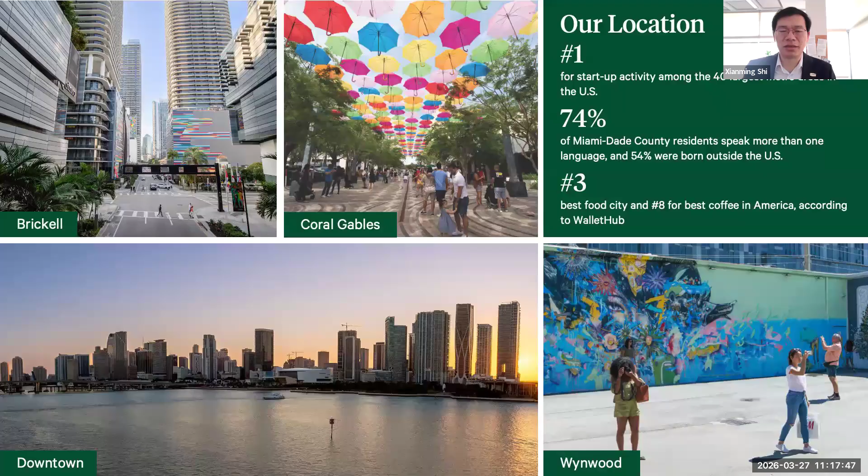Before I start, a little bit of infomercial in terms of who we are, for those of you who don't know about University of Miami, since I know this is going to be on YouTube. We are in a wonderful city, Coral Gables, which is very close to Miami, and there's a lot of entrepreneurship in the area and abundance of opportunities and good food.

So what's the background of this? Before we jump into the tools or solutions, human society truly faces tremendous challenges when it comes to the built environment, especially. For example, the transportation system, as we know it, is getting really old and aged, and there's a lot of deferred maintenance, and the durability and reliability of the built environment is compromised by many different distresses.

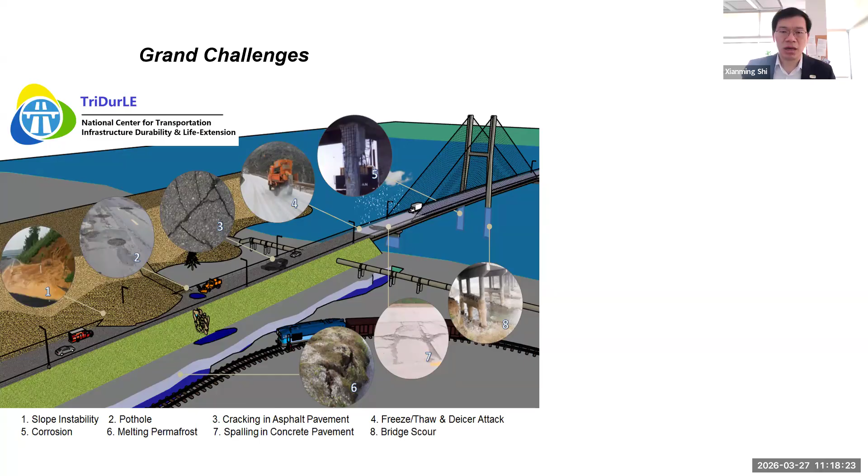On top of that, we also have climate change as we know it. It's not just CO2, but also other greenhouse gas emissions. When it comes to the specifics of man-made CO2 or CO2 equivalent emissions, both the building sector and construction materials contribute a significant chunk, one of which is the use of cement. Ordinary Portland cement, typically 1 ton of cement, takes about 0.8 tons of CO2 emission. So that's a challenge we need to tackle.

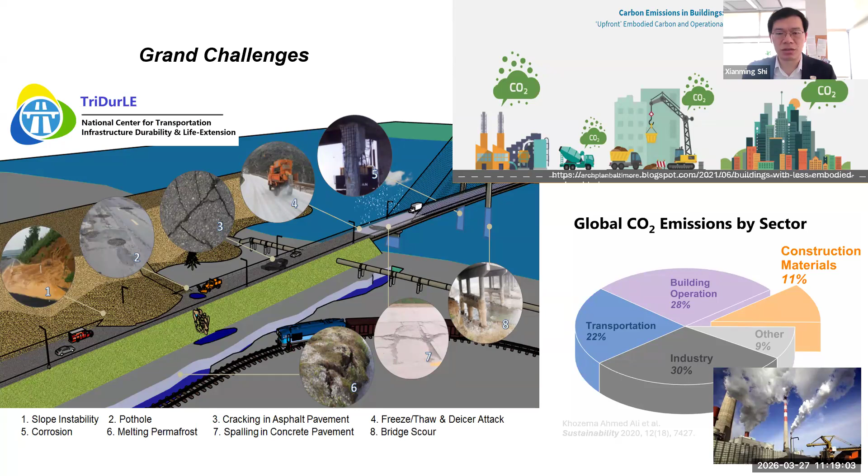So what is our vision? The vision is really making infrastructure part of the climate solution, because we always consider infrastructure as part of the problem when it comes to climate change. Here's a patent we applied for back in 2023, I believe, and the IP is already licensed to a company in the UK. Basically, the way we do it is leverage this material known as biochar.

Biochar is nothing new. Farmers in Africa had played with this material for thousands of years when it comes to soil amendment. But in recent decades, because of the interest in biochar sequestering CO2 and slowing down the release of CO2 back into the atmosphere, the agriculture industry has been increasingly interested in biochar. But when it comes to the construction industry, this is relatively new.

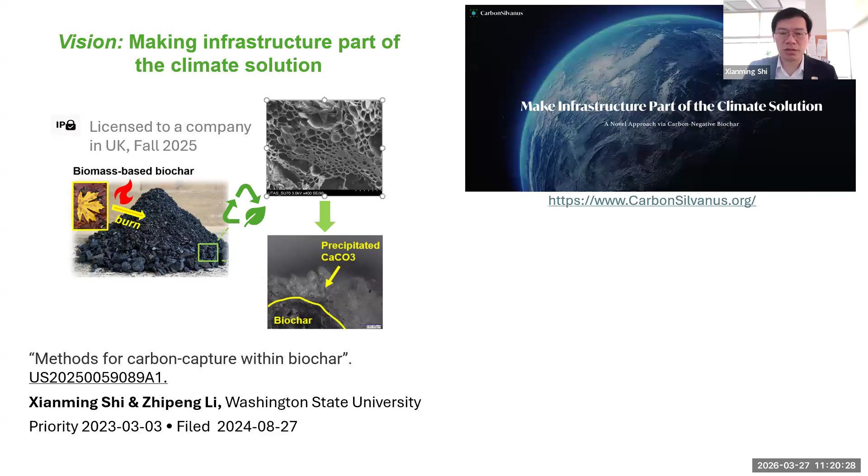So we filed this patent back in 2023 and licensed it last year. Our IP is more focused on how to make this biochar more valuable. As I'll share with you later, we did some surface engineering of this biochar, and we launched the company in 2024.

This chart on the bottom right shows the x-axis is the particle size, the y-axis is the specific surface area. The typical coarse aggregate or rock we use, or gravel, in concrete is relatively large, as you can see at the bottom right. If you can find a way to make it really, really small, we're talking about nanometer size, for instance 1 nanometer - for reference, human hair is about 80 microns, or 80,000 nanometers, in diameter. So if you can make things really, really fine, then you will achieve between 10,000 to 1 million square meters per kilogram of surface area. And with that, there's a certain nano effect, and the material becomes much more reactive.

So that's kind of the guiding principle for the IP we produce: to precipitate nano or submicron sized calcium carbonate on the surface of the biochar, because biochar is mostly a carbon-rich material. Depending on the feedstock and the pyrolysis procedure, you could have probably 40 to 95% carbon.

So in a way, it's counterintuitive. Why do we put carbon into concrete? Because traditional wisdom tells us that's silly and it's not even allowed, since it may take away a lot of the admixtures or chemical additives in fresh concrete. In many states, for instance, the Department of Transportation would not allow anything having a loss on ignition higher than 3%. Here we're putting in a material which has a lot of carbon, or a high loss on ignition, so that's counterintuitive. That's exactly where, when you challenge traditional wisdom, innovation occurs.

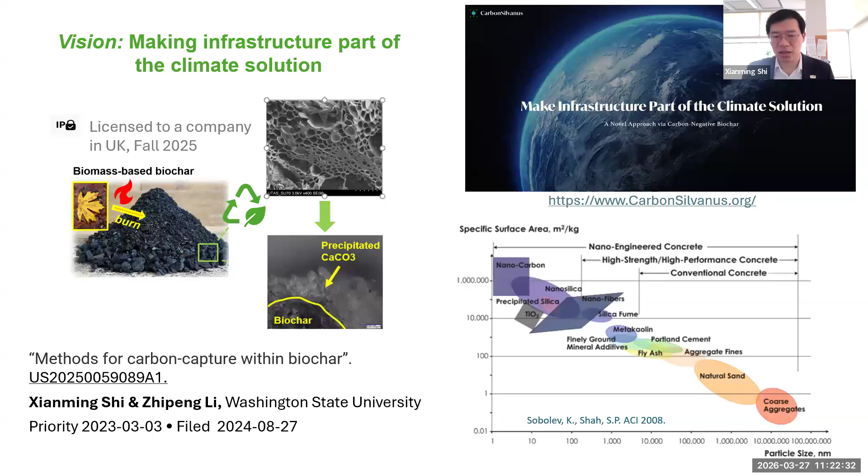So again, in addition to putting engineered biochar into cementitious composites such as concrete, mortar, grout, or paste, we also try to engineer it so that it's suitable for asphalt. For asphalt pavement, when we pave it, there's a lot of toxic fume coming out of the pavement—that's one issue. And also, asphalt pavement by itself has its own carbon footprint. So we have an ongoing study, sponsored by the U.S. Department of Agriculture, trying to divert agriculture waste or farm waste toward this process to produce biochar, which would then replace a part of the asphalt binder and some of the mineral fillers in the asphalt mixture and make it net zero.

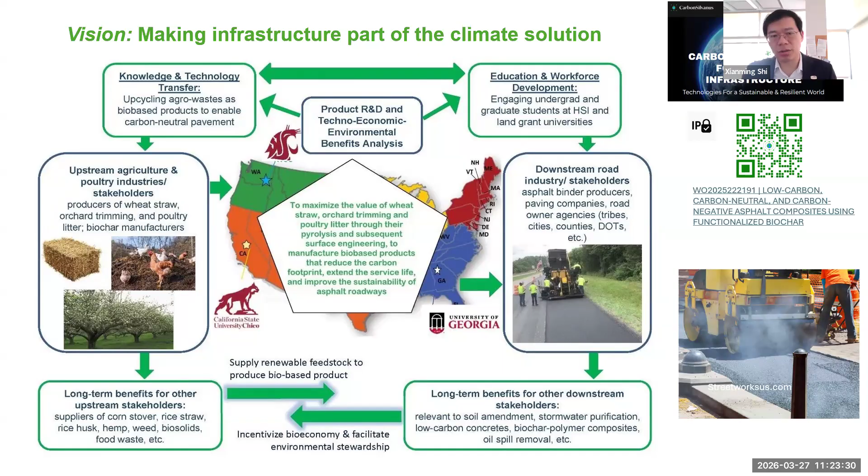So today, in terms of the beneficial use of biochar in concrete or cementitious composites, I'll share with you 4 different studies. Actually, some of this is not yet in the published domain.

The first one is sponsored by Washington Research Foundation, and my team is here from when I was a professor at Washington State University a couple of years ago. Ayumi and Zhipeng are the main doers for this project, and you can see we look into 2 types of feedstocks, wheat straw and a biosolid—I believe it's cow manure. Then through a process known as pyrolysis, you basically heat it up to really high temperature, typically 500 to 800 degrees Celsius, with very little oxygen, and you generate biochar.

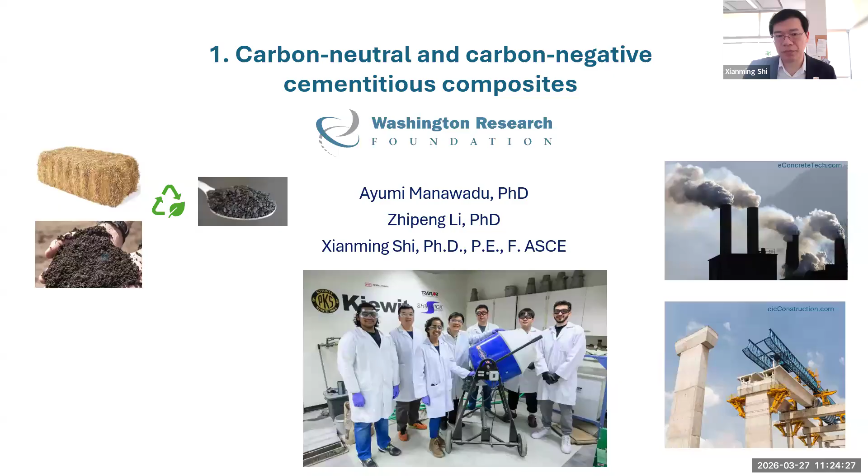And biochar is a carbon negative material. So basically imagine the photosynthesis of plant species very efficiently grabbing CO2 from the air and storing it as solid carbon. Now, if we find a way to use it as, say, a greener cement, then at the end of life of the concrete, it will never go back to the atmosphere. That's a very efficient way of storing carbon or sequestering carbon. Alternatively, what naturally happens is the biomass would either catch fire or go through fermentation and release the CO2 or soot or methane.

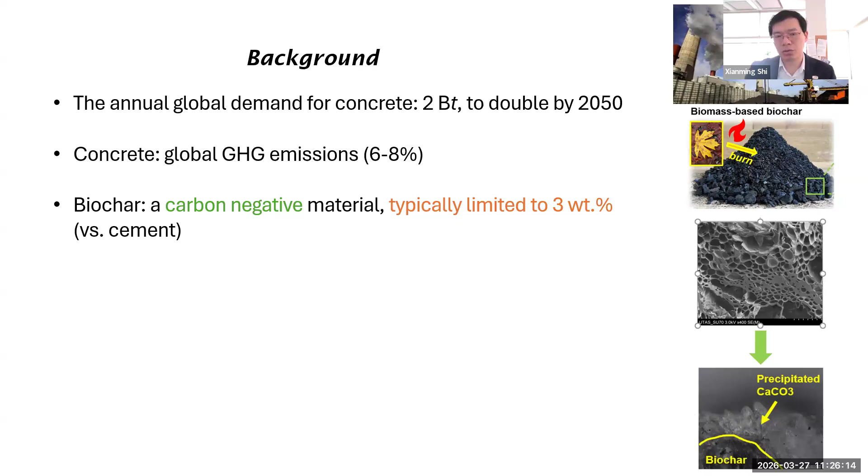Those things are very powerful—actually, methane and soot are more powerful than CO2 when it comes to global warming potential. The challenge, though, is traditional wisdom, again, because of that loss on ignition or incompatibility with concrete admixtures. Typically, people are playing with 1 to 3% by weight of cement when it comes to exploring the use of biochar in concrete, and that was kind of an unwritten, unstated assumption. Then in 2023-ish, we decided to challenge that conventional wisdom. This project aimed to explore different ways to modify biochar to improve its quality or compatibility with concrete.

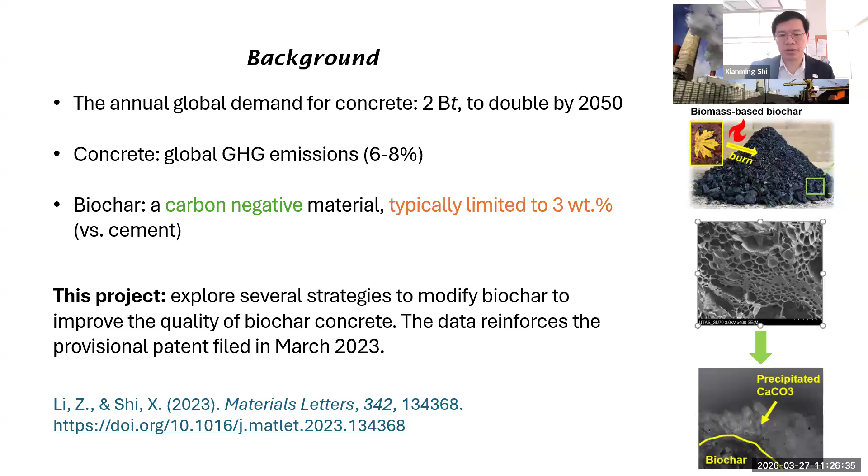So we published a sort of proof-of-concept paper in March 2023. Here's a study where we first start from this cow manure derived biochar. As you can see, we used concrete washout water, which is another waste stream from concrete production, and it has relatively high pH, around say 12.0. You can see we dry it, then we grind it, we sieve it. The purpose of using the washout water is because it has not just the high pH, but also calcium cations in it, and CO2 from air would react with this calcium cations and precipitate the nano or submicron size calcium carbonate on the surface, as shown here under the scanning electron microscope.

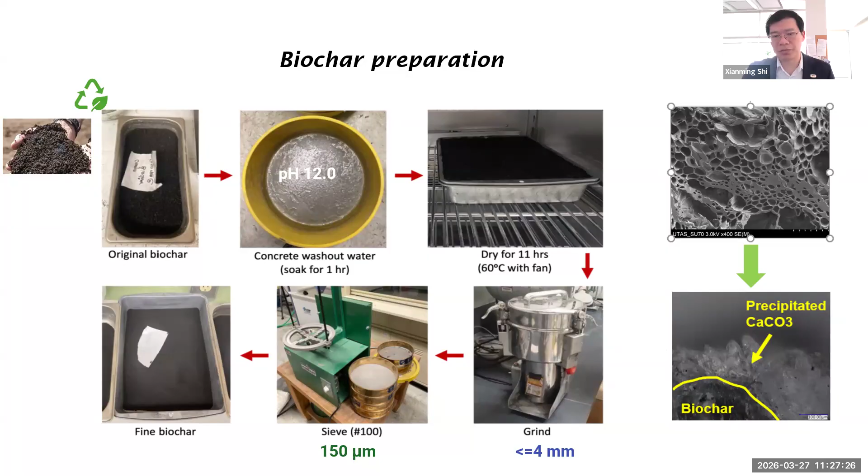So we explored several mix designs. Each column is a different mix design. For those less familiar with pound per cubic yard, 1 pound per cubic yard is about 0.6 kilogram per cubic meter. We used a water cement ratio of 0.4 for these concrete mixtures, a sand to cement ratio of 2.0, and a gravel to sand ratio of 1.75.

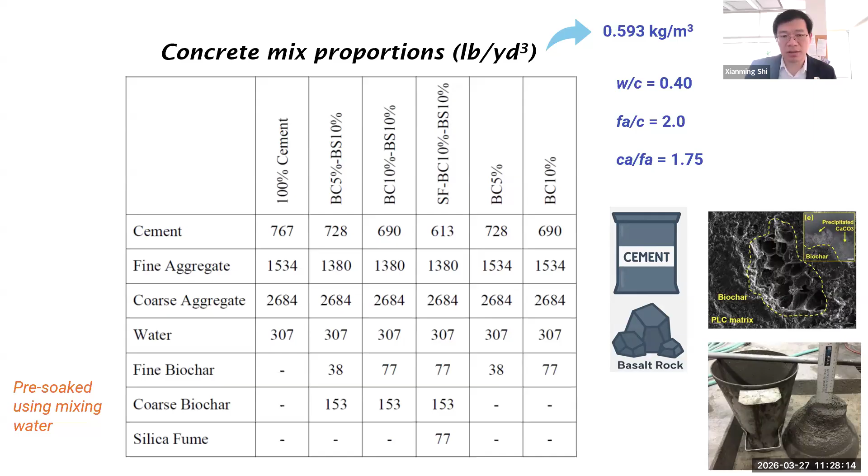And we pre-soak this biochar. As I showed earlier, before grinding it's coarse biochar, and after grinding it's fine biochar, less than 150 microns, which happens to be about twice the size of human hair. So we use these symbols: fine biochar is BC, coarse biochar is BS.

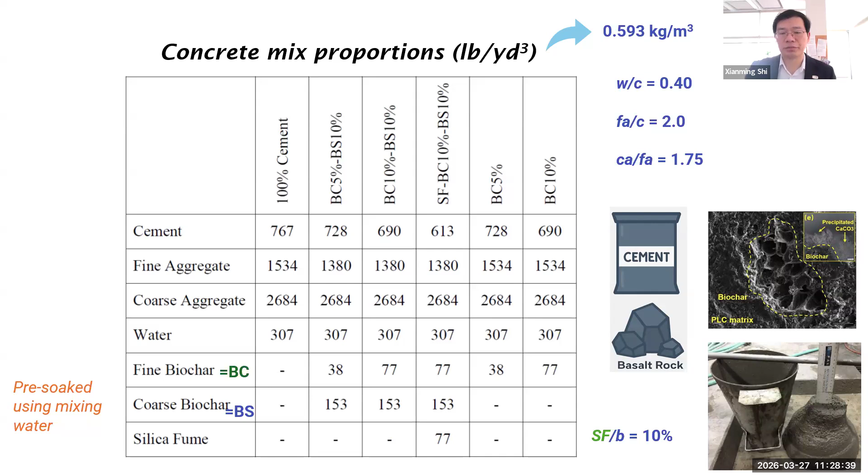Also, in one of the mix designs, we explore adding 10% of silica fume, yet another industrial byproduct, to replace cement. So we got six mix designs. We want to test them.

First, the good news is that biochar amended concrete can achieve better strength at 28 days than the control. You can see here 100% cement concrete is around 6,400-ish PSI. Then you look at 5% replacement of cement using fine biochar, you're achieving some improvement of the compressive strength. Similarly, this one is 5% of cement replaced by fine biochar and 10% of sand replaced by coarser biochar, and again we're seeing benefits in some of the mixed designs.

That's very encouraging. Keep in mind, our intention is not to truly improve the strength - we just want to achieve at least comparable strength. The point is to reduce the carbon footprint of these mixed designs.

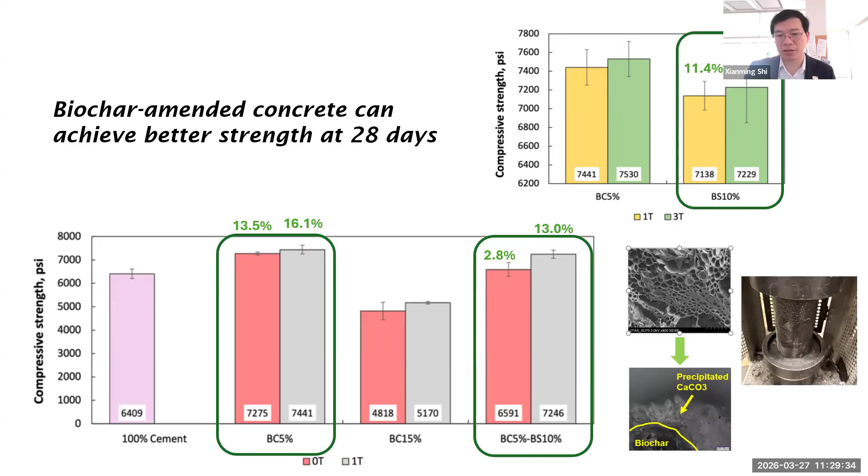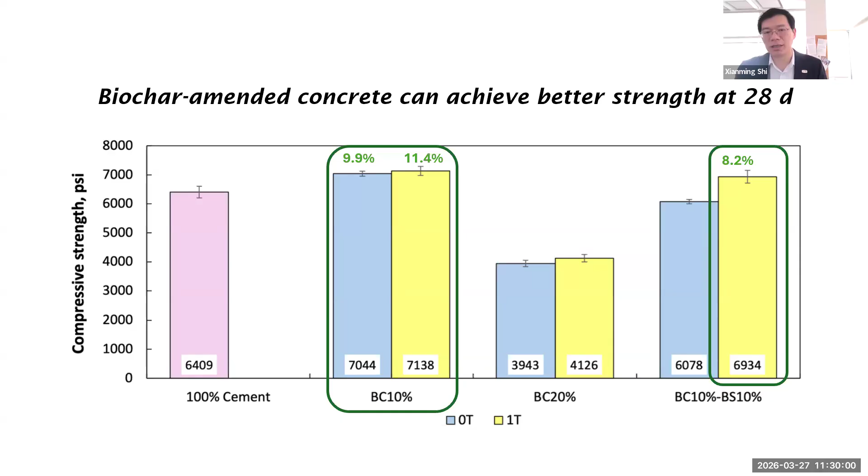Continuing that, we went a little higher, 10%, still very good. And even 10% replacement of cement and 10% replacement of sand, they're very good. The different colors show 0T, which means we didn't go through any wet-dry cycling, and 1T is one cycle of wet-dry, to see the different levels of carbonate precipitation.

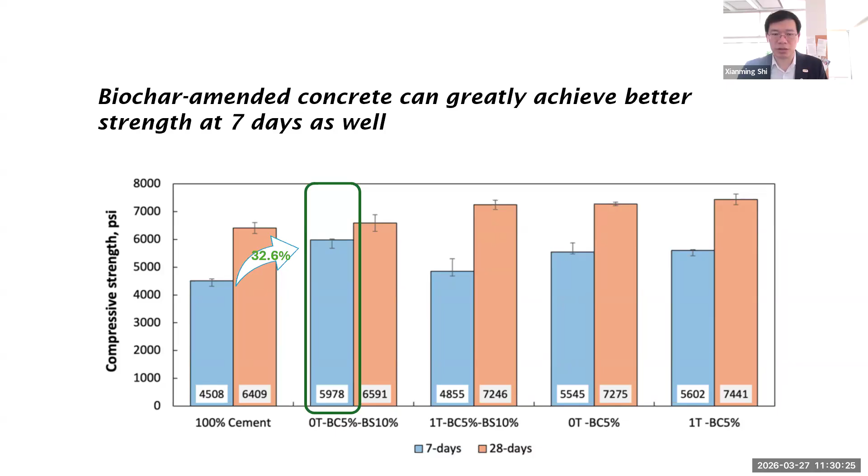Now the question becomes: can we sequester more carbon or CO2 in concrete without losing the strength? So we played with a few different mix designs, as you can see here. I highlight the ones which are very promising. Roughly speaking, you can replace cement at 10% with this specific product.

As I'll mention later, unfortunately or fortunately, I don't know, not all biochar products are the same. They are very different depending on the feedstock and the pyrolysis parameters. The devil is in the details.

Now, if we want to achieve carbon neutral concrete, here's a very interesting mix design. Of course, we had to rely on 10% silica fume to replace the cement binder, and then we used 10% of the engineered biochar to replace cement, and then 10% of coarse biochar to replace sand. You can see, compared with the control, we're achieving roughly 28 to 30% better strength, both at 7-day and 28 days.

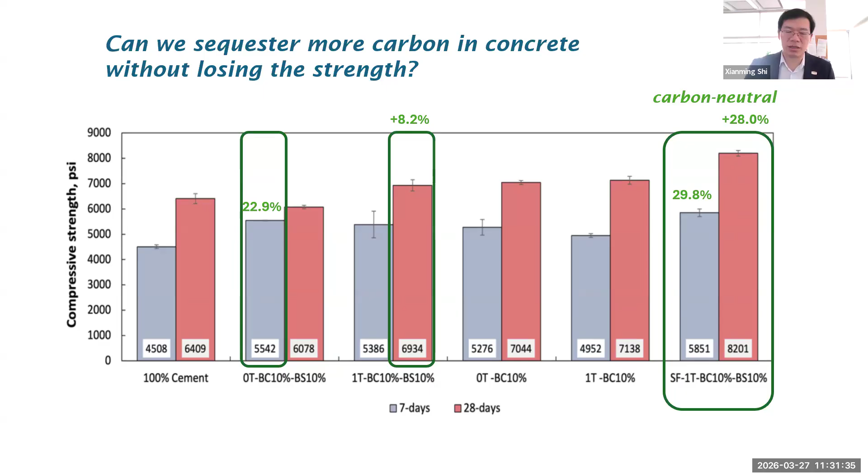So, moving on to some other thoughts in the same pattern we found: what if we chemically treat the commercially available biochar? Can we do some magic with it? So we play with two types of biochar, one derived from cow manure, one from wheat straw. And we use different chemical agents. We're trying to induce some sort of surface functional groups such as hydroxyls or carboxyls on the carbon surface.

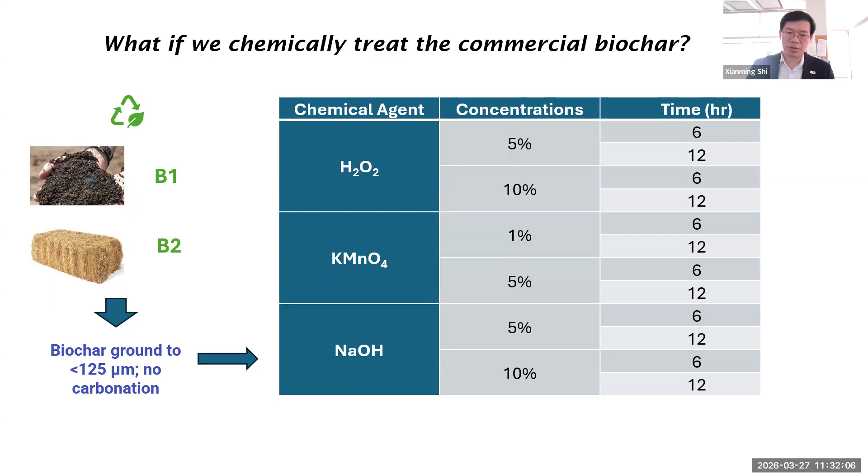So the good news is, in some cases, yes, we are able to achieve improvement in compressive strength at 28 days. The most effective one seems to be the one using 10% sodium hydroxide treating the biochar for 12 hours. We also did Fourier transformation infrared spectroscopy, or FTIR, and it basically shows our hypothesis was true - that we did induce the formation of hydroxyls, carboxyls, or even ether groups on the surface of the biochar. That's why they worked better - they chemically reacted with the cement hydration products.

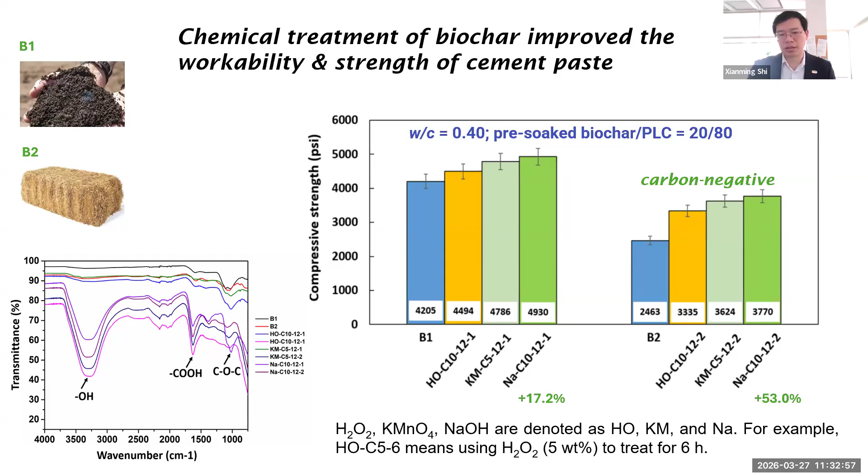Now moving on to another possible application scenario or use case: we want to see whether or not we can get even more biochar into another specialty concrete, which is cellular concrete. In that case, you're not aiming for really high strength - typically 5 megapascal or even less than that is good enough. You are really trying to achieve sound insulation, thermal insulation, or things of that nature.

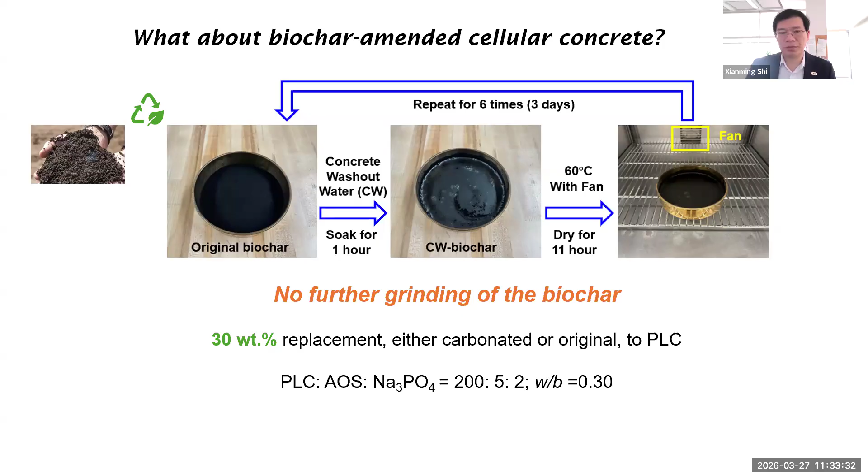So here we aim for 30% replacement of cement by biochar, and we had a few mixed designs. The AOS is basically a foaming agent working in combination with sodium phosphate. They seem to foam and stabilize the foam inside the cellular concrete.

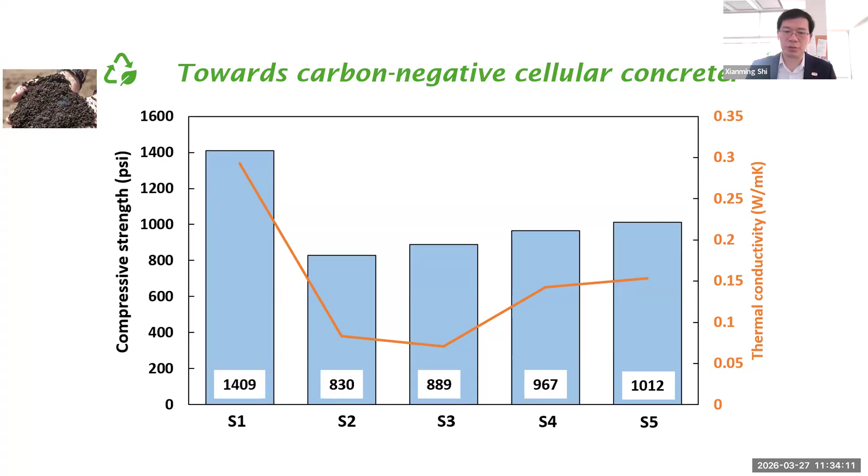When you're foaming it up and adding so much biochar, 30%, of course you're going to lose some of the strength, but it's still sufficient to serve as cellular concrete, because usually these are not used as structural concrete. They're used as separators, sound insulation, thermal insulation, and fire resistance, because these properties are built in due to the built-in porosity of the pores you saw in the biochar.

If you look at the thermal conductivity, it's actually well within the range designed or specified for this type of cellular concrete. Well, that's the first study. So we show that biochar has great potential, and despite conventional wisdom of not putting carbon-rich material into concrete, we did it anyway, and it works out.

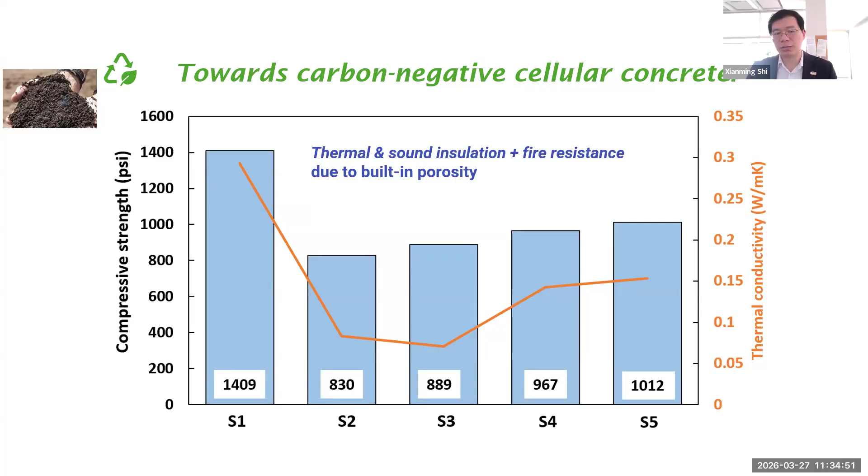And the key is we need to understand what type of biochar and what type of microstructure or surface chemistry. Now the second study stemmed from the fact that, as I mentioned earlier, most DOTs or state departments of transportation would not allow you to put in even fly ash that had too much carbon in it, or a high loss on ignition. The reason is that, again, conventional wisdom says the carbon, or the free carbon in the ash, in this case in the biochar, would consume the air entraining agent and make the freeze-thaw resistance of the concrete really poor.

So the counter argument in this case is, okay, what if we don't need the air entraining agent, because we have built-in porosity at the micro scale, as you saw under the microscope? Then maybe we can engineer it so that we don't depend on entraining admixtures to give the concrete its freeze-thaw durability. So the short answer is yes, we were able to achieve that goal without use of an entraining agent.

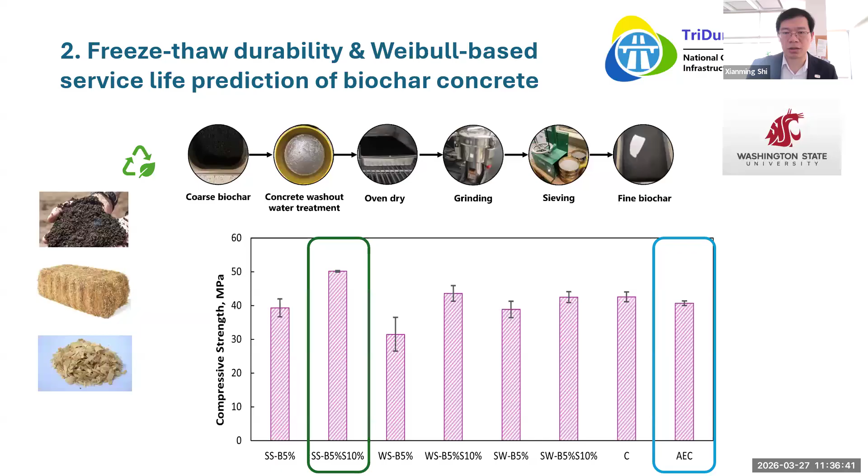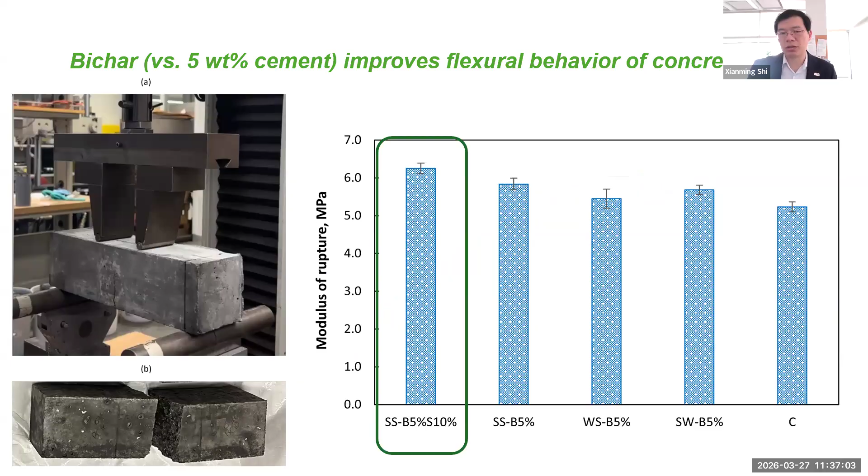Now we also demonstrate at the 5% replacement level, the use of biochar significantly improved the flexural behavior of the concrete. Again, flexural behavior is pretty important in many of the use case scenarios, so that's really good news.

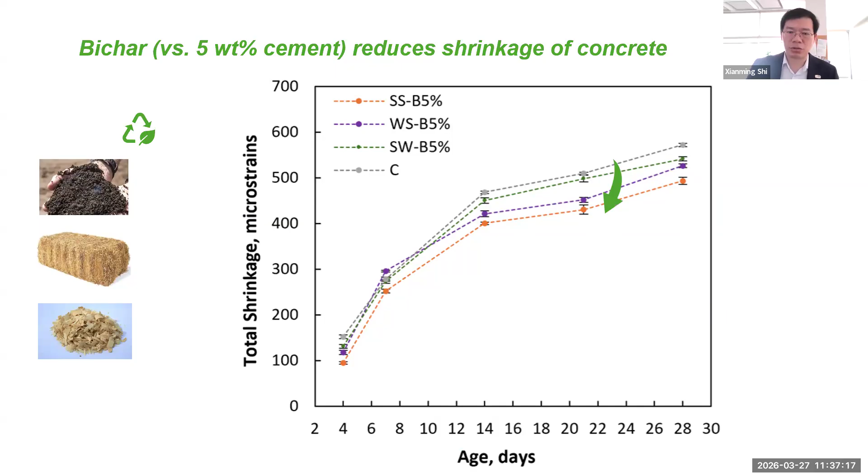Now we also found that the use of this biochar to replace 5% of cement reduced shrinkage of concrete. Again, yet another win, because shrinkage-induced cracking is a concern for the durability of concrete in many cases.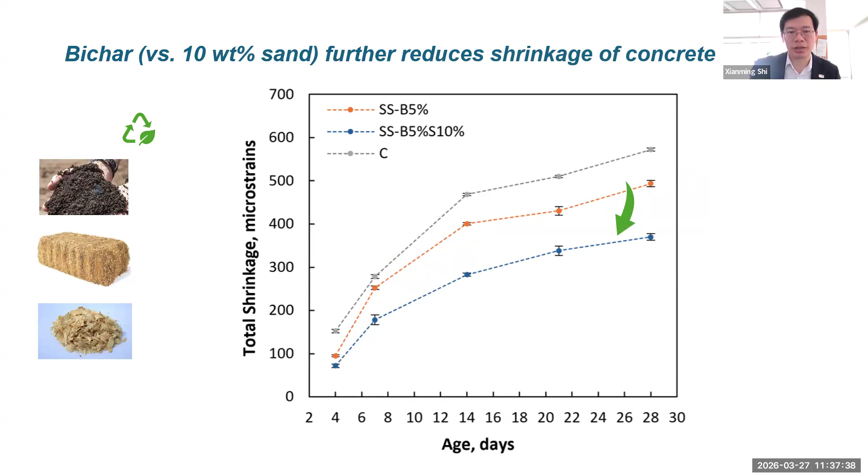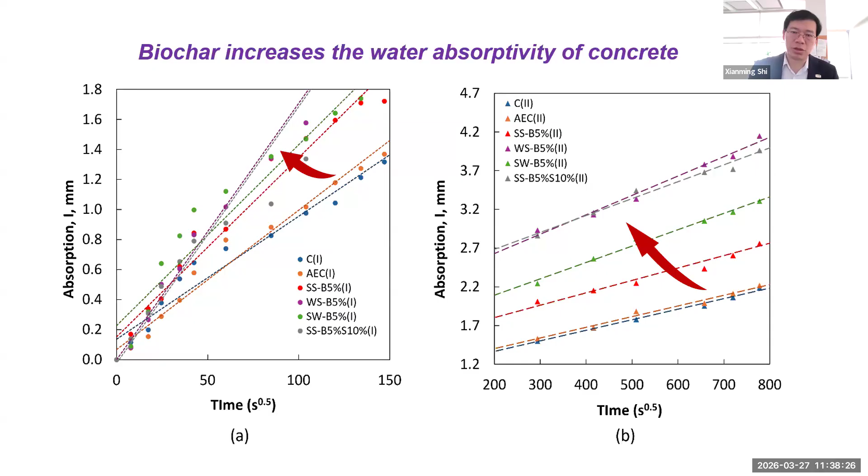And the secondary absorption also increased, which is typically water coming from the environment into the concrete and filling the larger pores. So this is a concern, but there are tools such as admixtures that can help reduce this water absorption.

But we haven't done any real testing to mitigate that. We just want to show, okay, there's some benefits we showed earlier, and here's a downside.

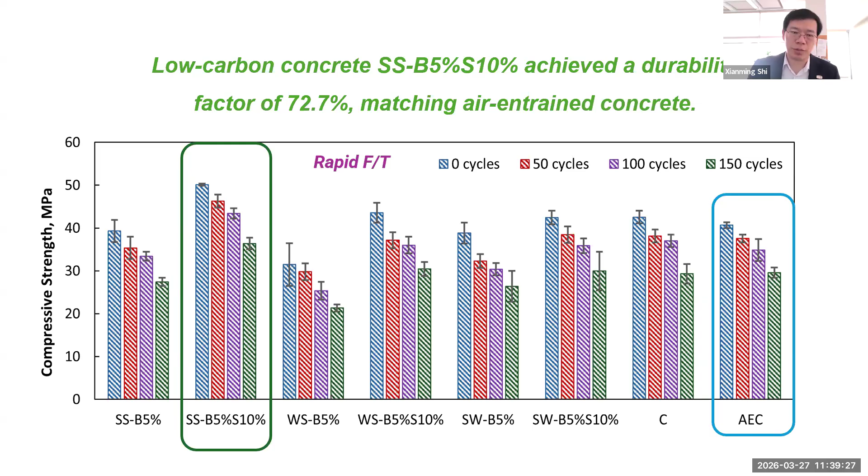And when we calculate the durability factor, it's almost 73%, which matches with air-entrained concrete. So it's all very good. In other words, we don't actually need an entrainment agent for biochar-amended concrete to be used in freeze-thaw environments.

Switching gears to a third study sponsored by Washington State Department of Commerce and two university transportation centers I used to lead or co-lead. Here we explore 4 types of biochar products, all commercially available. There are hundreds of companies in the US who manufacture biochar using locally or regionally available feedstocks, but their intended market is usually the farming industry, like soil amendment. So we're trying to leverage these commercially available products for a different application.

The feedstock could be woody biomass, such as softwood wood chips, I believe from Oregon, which is why we named it OR. Another one is straw-derived biochar from Washington State, another is from cow manure, and yet another is from wastewater treatment residual.

This specific product, unfortunately, turned out to be very poorly produced. The quality was not sufficient for it to be used in concrete. So with a little trial and error, we decided to use the ground biochar as cement replacement for the first two types. For the third type, from biosolids, we let it go through the CO2 weathering process, as discussed earlier, with concrete washout water and sometimes wet-dry cycling, then replace a part of the sand. Again, the key message is not all biochars are the same.

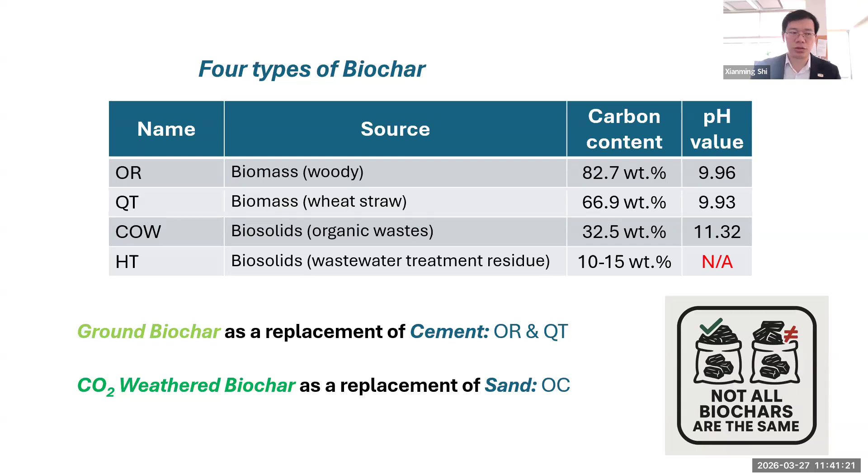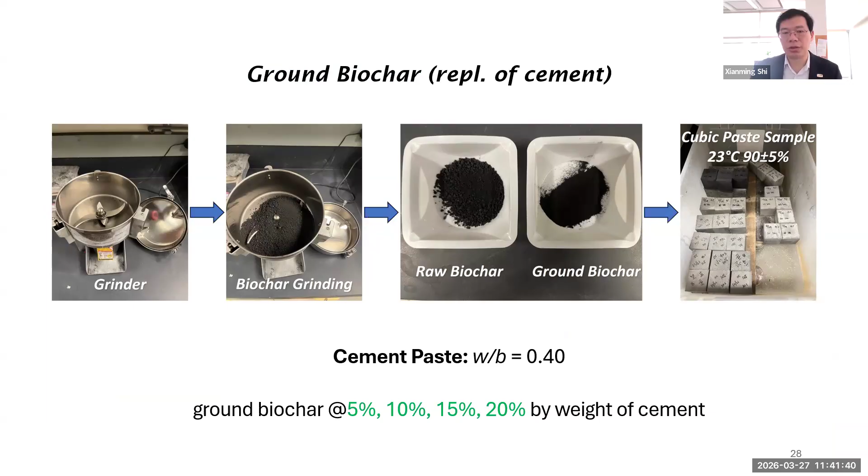They behave quite differently from each other. It's not like your traditional, well-produced, ordinary Portland cement. So it's not a plug-and-play technology at this moment. Again, with grinding, we get ground biochar to replace 5, 10, 15, 20% of cement in the concrete - actually, in this case, we start from cement paste.

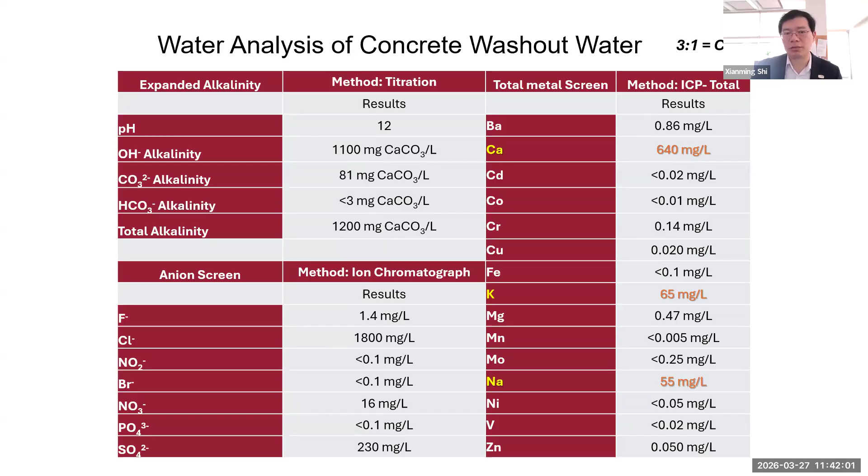So just for those who are curious, what's in the concrete washout water? Again, pH 12.0, and there are all kinds of trace elements - some calcium, some potassium, some sodium - which is what we need to enable that precipitation of carbonate on the surface of biochar.

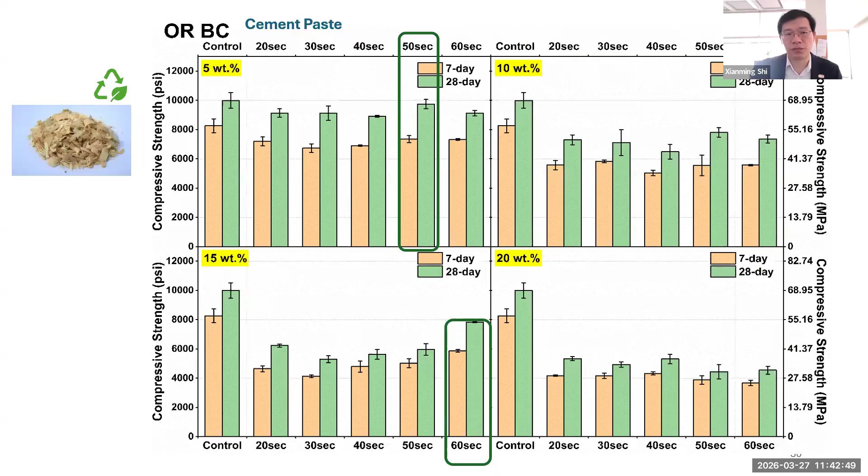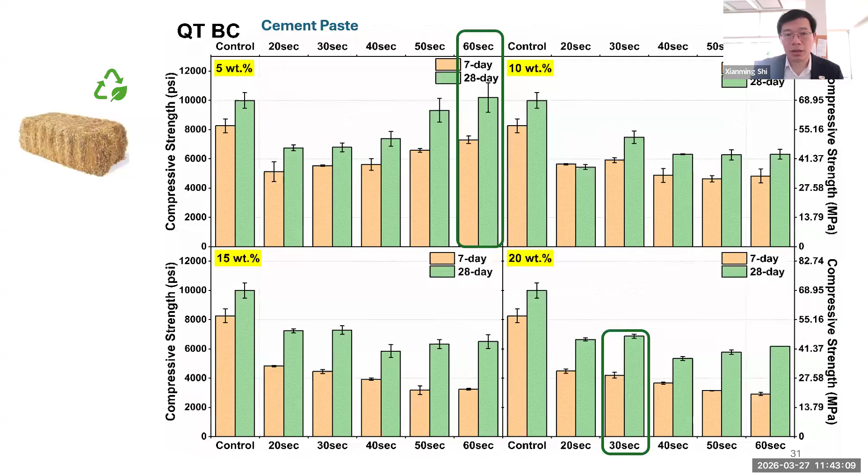Now here's another one, again 50 or 60 seconds. What does this mean? We see grinding for different amounts of time gets it typically finer and finer until it approaches the size of ordinary Portland cement particles. So the assumption or observation is that when you grind it to such a degree, it's very similar in terms of size gradation to the ordinary Portland cement, and they induce better products in the end.

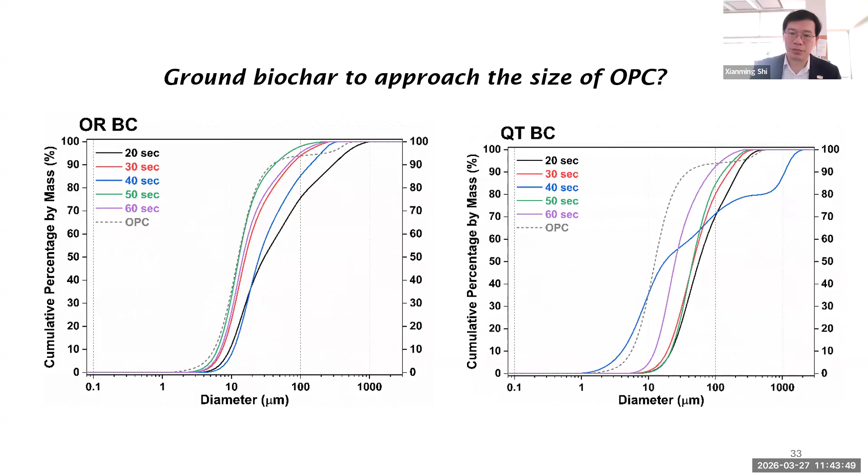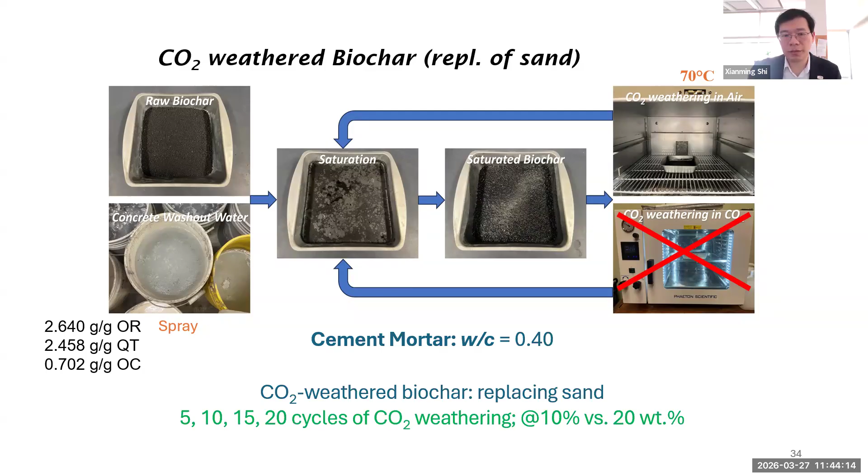Now for this wheat straw derived biochar, it's not as beautiful a correlation, but it's close enough. For the ones replacing the sand, we need to make the biochar a little stronger or stiffer, so the carbonation or precipitation of submicron or nano-sized carbonate will be essential. We did that and tried replacing sand at 10% or 20%, and we also tried different numbers of cycles of CO2 weathering.

The thing is, with those biochar products derived from woody biomass, they're not really good sand. Even after carbonation, they're very problematic, so we don't want to use them in these mortar samples.

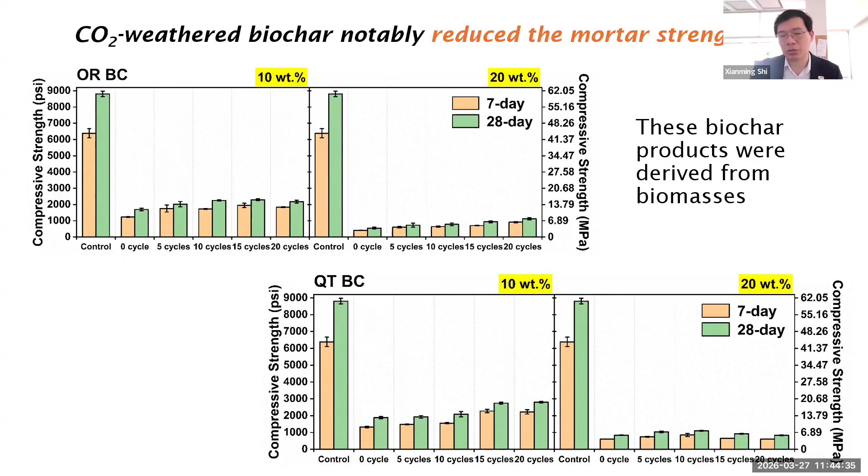However, for the biosolids derived biochar, we were able to get to a reasonable balance - meaning achieving reasonable compressive strength of the mortar samples while also getting some carbon credit, basically sequestering as much CO2 equivalent as possible. So we were achieving a reasonable balance. We did try to optimize the number of cycles we subjected the biochar products to in order to get the right amount or size of carbonate. That's a lot of trial and error.

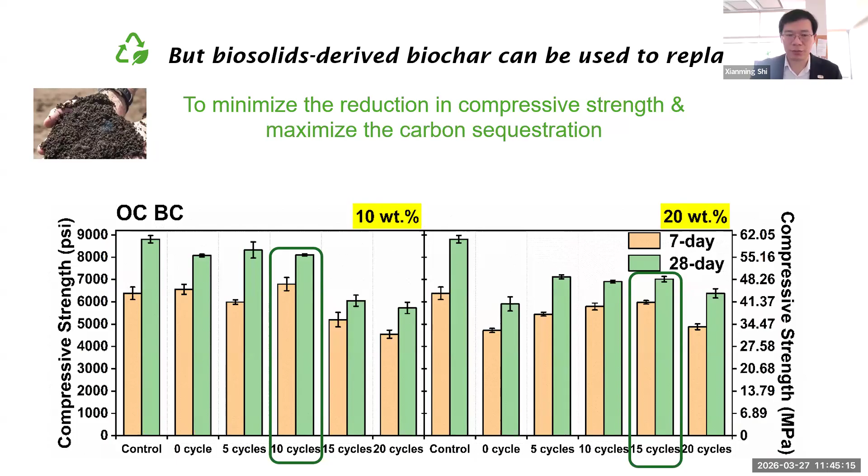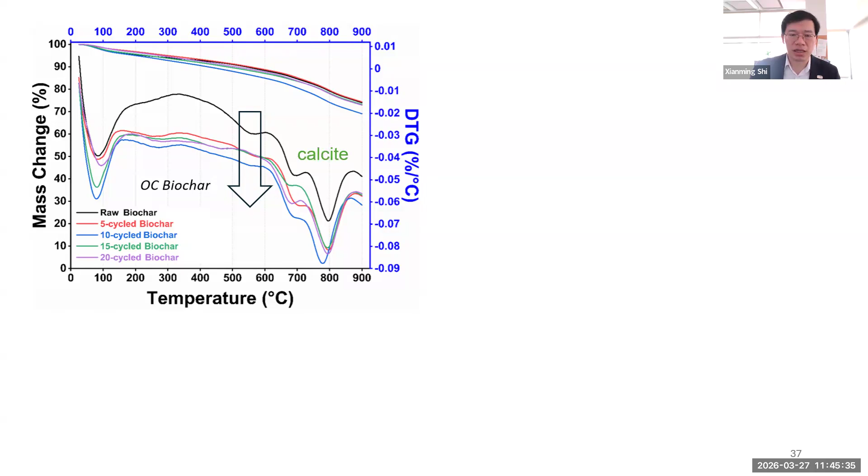Again, we did the TGA, or thermogravimetric analysis, which shows there is a peak between 500 and 600 degrees. As we subject biochar to more cycles, that peak sort of disappears. However, here's another peak, corresponding to calcite, which increases over time.

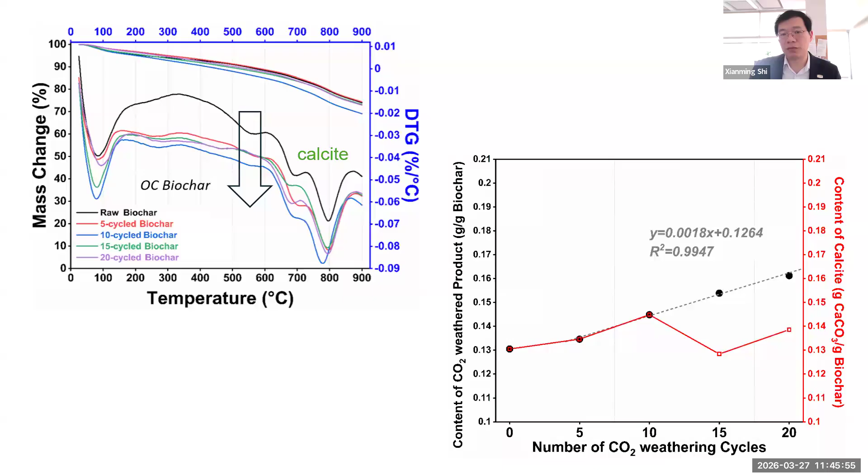So when we plot it, the x-axis is the number of CO2 weathering cycles, and the y-axis on the left is the amount of CO2 weathered products. The black line is almost a linear increase over the number of cycles. However, if we only focus on calcite as part of the product, it peaked around 10 cycles, which is the red line.

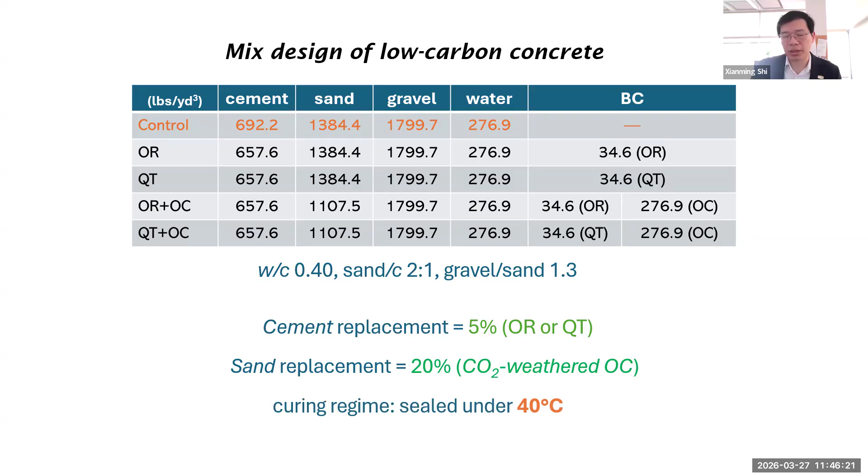So with that knowledge, we move on to different mix designs. In this case, we started from paste, then mortar, and now concrete. To accelerate the test, we cure them under 40 degrees Celsius, roughly doubling the rate of hydration.

The good news is that we're achieving about 25% better compressive strength at 28 days when we replace cement at 5%, either with the Oregon softwood chip derived biochar or the Washington State wheat straw derived biochar.

But that strength is almost too high. We don't necessarily need that kind of strength right now. So what if we add even more biochar? We achieve, in this group, replacing 20% of sand with the weathered biosolids derived biochar, comparable, slightly lower strength, but that's typically sufficient, especially for pavement applications.

But then we may be able to incorporate a lot more CO2, gain a lot more carbon credit, and also divert more waste streams towards beneficial use.

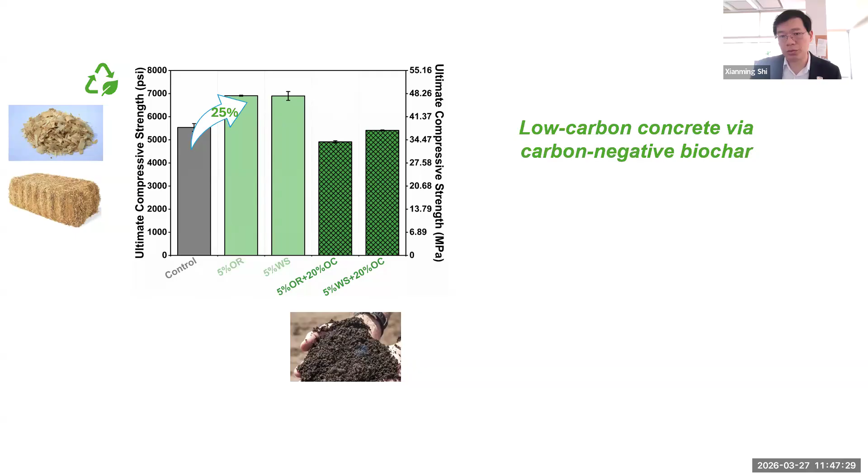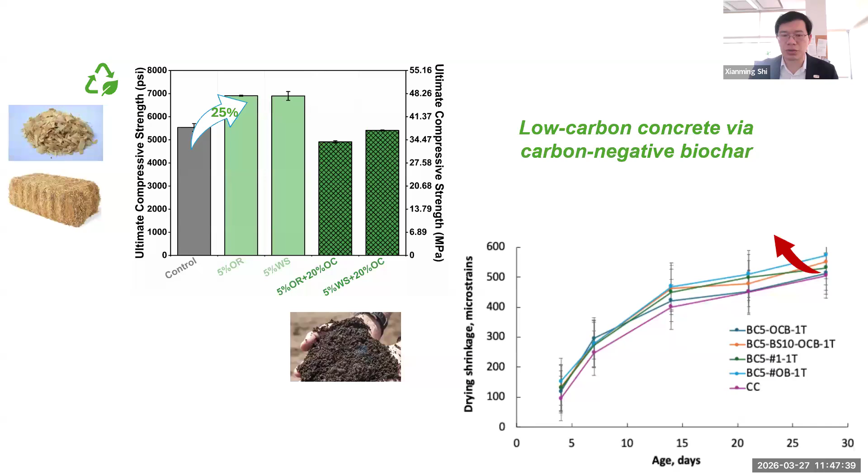Dry shrinkage-wise, it's different than what we saw in the other study. We are seeing slightly increased shrinkage because, well, every product is different, I guess.

What's interesting here is my collaborator, Dr. James Amonette, did some preliminary environmental life cycle assessment, or LCA, to see how much carbon credit we're getting. If we're replacing cement at 5% with this biochar, say Oregon versus Washington, we're achieving quite different numbers. If we're using the one from softwood chips from Oregon, at 5% we're reducing the CO2 carbon footprint of concrete by almost 47%.

In other words, if we're able to replace cement at 10%, we're getting really close to carbon neutral or net zero. However, with wheat straw, we need a lot more. Again, the devil's in the details, depending on the energy consumption, byproducts like particulate matters, and whether or not you recycle the waste heat. There's a lot of detail in these calculations.

And also for the biosolids derived biochar, actually, we're not getting much carbon credit. It's like 5%. Even if you replace sand with 20% of this biochar, you're really not getting much of that carbon credit.

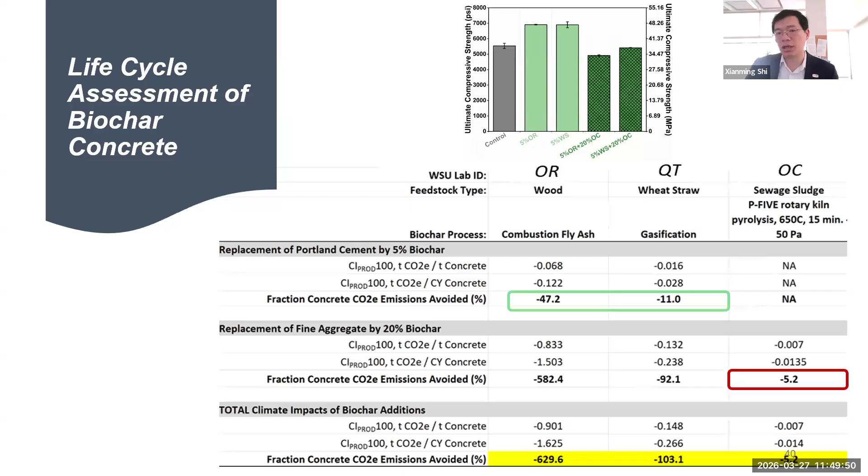So again, not all biochar products are the same, and there's certainly more room for innovation or optimization, because these products were not created for the construction industry per se.

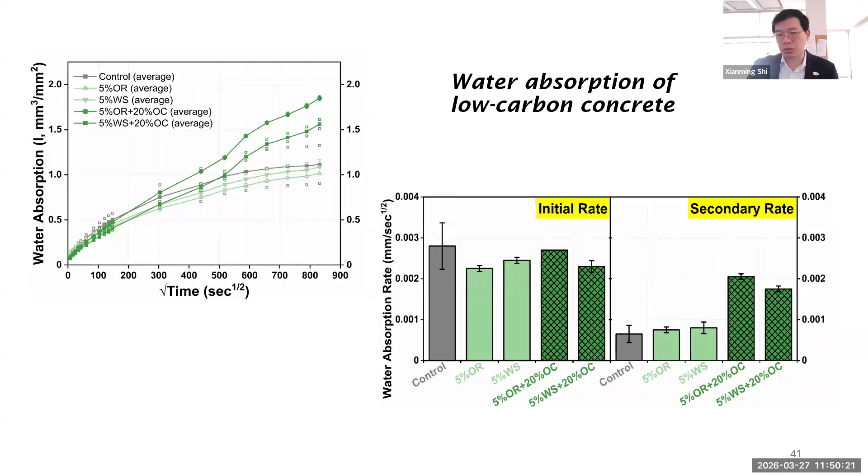Now, water absorption, again, actually in this case, the initial rate, as you can see here, is not too bad. It's basically comparable with the control, in some cases even slightly lower. But the secondary rate, in some cases, especially when you incorporate too much sand replacement by biochar, does increase. So again, there are tools to reduce this kind of water absorption if needed.

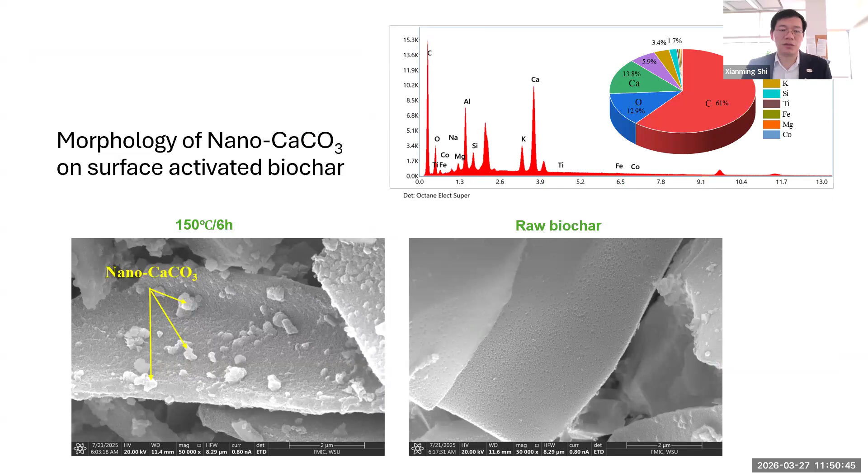Just to share with you a picture of nanocarbonate. Since we talk about nanocarbonate, here's the direct evidence, you actually see them. On the right-hand side, the SEM, or scanning electron microscope image, shows the raw biochar pretty smooth, but after carbonation, you see the nanocarbonate. But the challenge is that in the field, we probably don't have this kind of ability to control it.

So we did something really rough, as you can see here. It's a very simple two cycles of wet-dry under ambient temperature with the concrete washout water. That's how we did it.

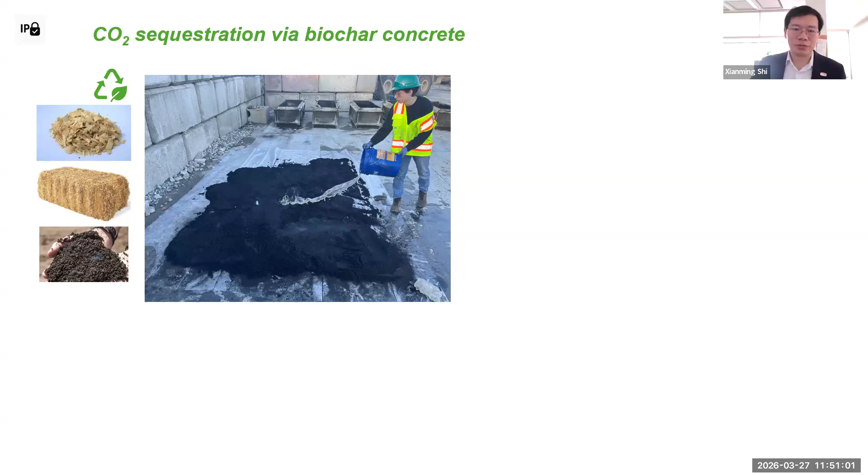And then we deployed about 145 feet long sidewalks with various mix designs, 5%, 10%, whatnot. Each mix side by side with control mix designs, we embed sensors to measure strain, temperature, moisture every 20 seconds. So we've got more than 18 months of data so far.

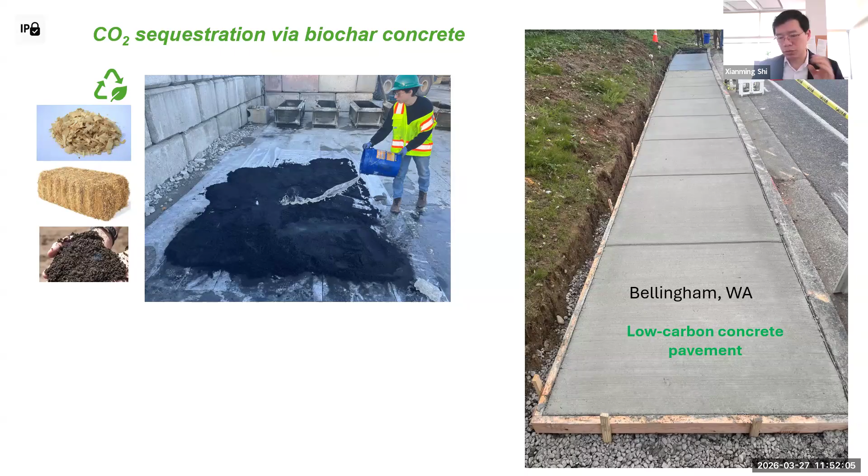We need to analyze the data and potentially publish it next year. The main observation so far was, yes, we're seeing a little bit more cumulative strain in the biochar amended concrete, even though it's not to the concern level, mostly because of the moisture and water absorptivity we were talking about earlier. So if we are concerned about that, we should incorporate some waterproofing admixture.

Yet another study is using biochar to replace 30% of cement in the specialty concrete known as ECC, or engineered cementitious composites, also known as strain hardening cementitious composites, or SHCC. This study was published in Cement and Concrete Composites last year.

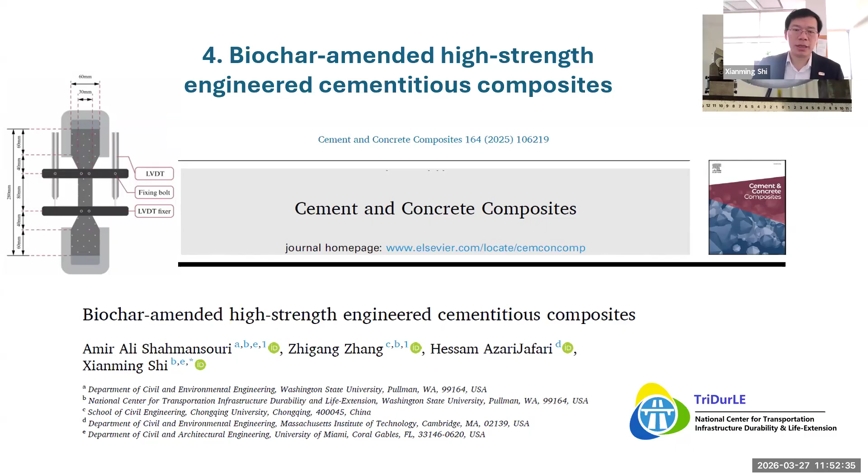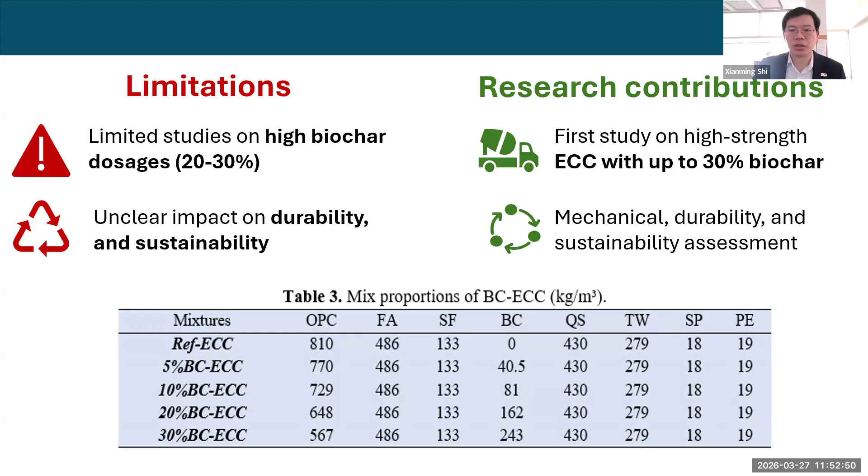We basically look at the issue again—nobody has ever done this before. People were thinking about 3% or less, but we're thinking, can we get to 30%? So the short answer is yes.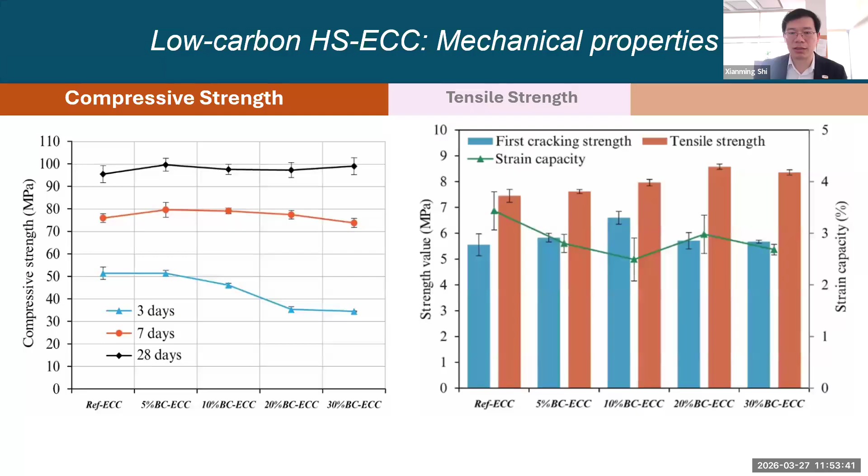The first cracking strength peaked at 10%, but even at 30%, you're still comparable with the control. The strain capacity did decrease compared with the control, but even that is still above 2.5%, which is sufficient in most applications.

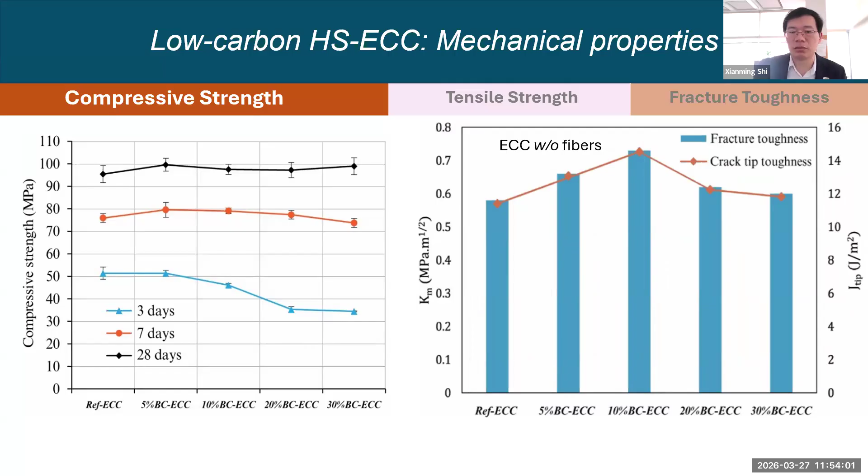Fracture toughness again peaked around 10% replacement of cement by biochar, but even at 30%, they're very similar to or slightly better than the reference. So it's all good news.

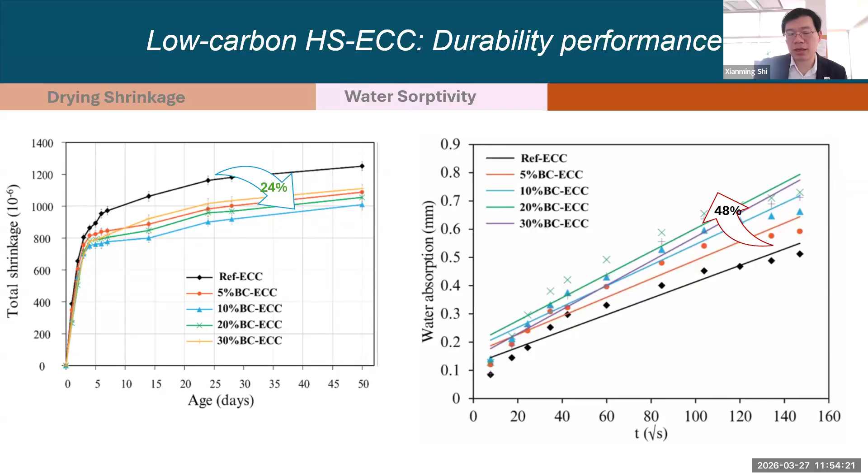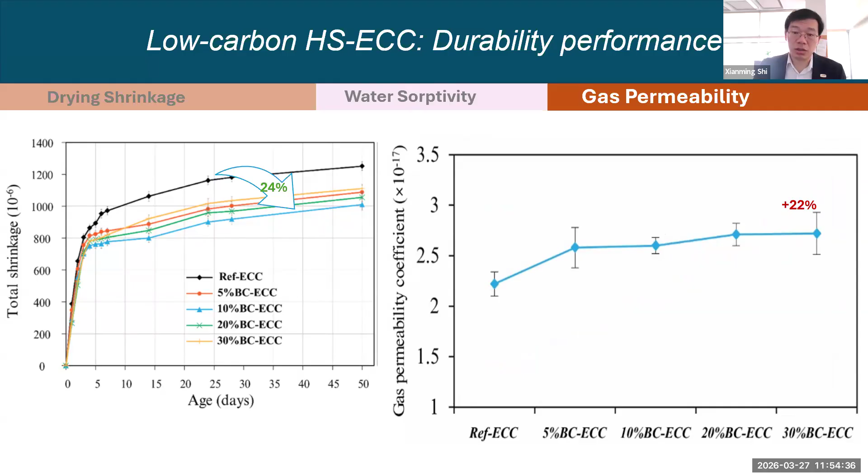What about drying shrinkage? We see 24% lower drying shrinkage—that's good. Water absorptivity is the bad news: a 48% increase, so we need some admixture to mitigate that, depending on the service environment. Gas permeability, an indicator of physical microstructure density, shows a 22% increase, meaning they're not as dense as the reference—again, that could be a concern.

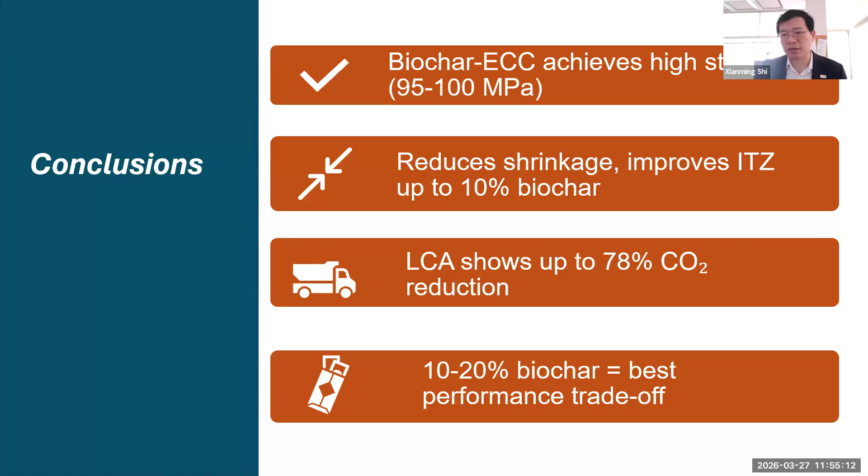To conclude, biochar ECC can achieve high strength, 95 to 100 megapascals, and we can improve the interfacial transition zone up to 10% replacement of cement. The environmental life cycle assessment shows up to 78% CO2 equivalent reduction. The overall balance is that replacing 10 to 20% with biochar probably achieves a good trade-off. With that, I conclude my talk.

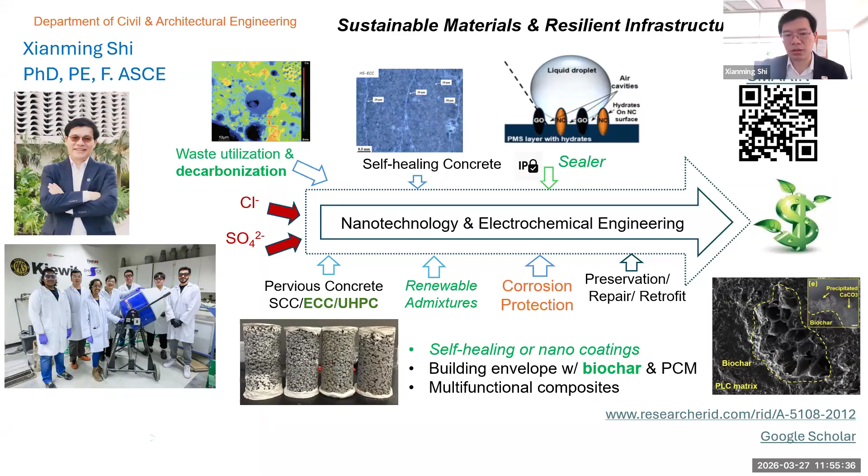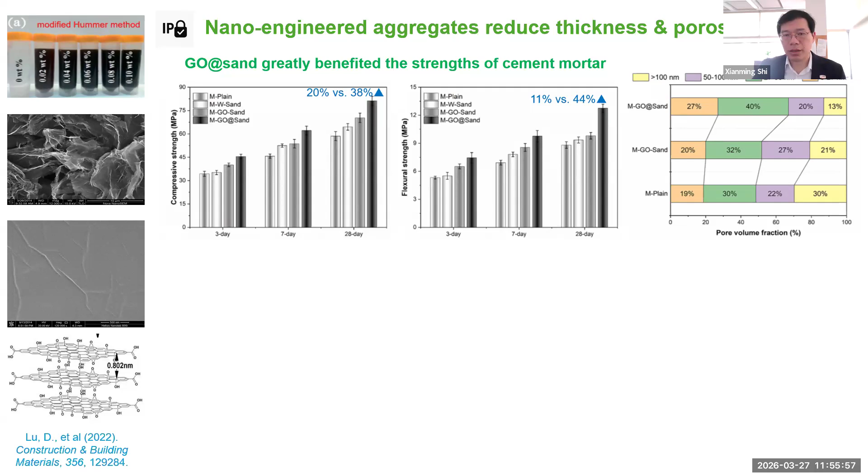Let's see, I'll quickly go through a few additional recent studies—they're not related to biochar, but they could be. For instance, we have another patent on pre-treatment of sand and gravel, which can achieve significantly better strength and durability with a very simple treatment.

Yet another one is self-healing UHPC, or ultra-high performance concrete. We produce microcapsules and demonstrate much better self-healing in UHPC. And for the next step, instead of using microcapsules, we're using biochar as the carrier of the healants.

We have another patent just filed last week, demonstrating we can use biochar as a carrier for healants. In that case, the healants are no longer chemicals—they are a mixture of two different types of bacteria.

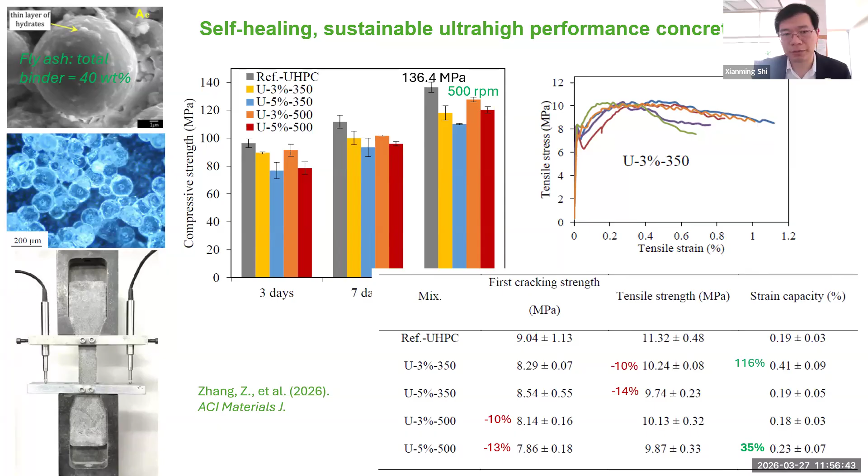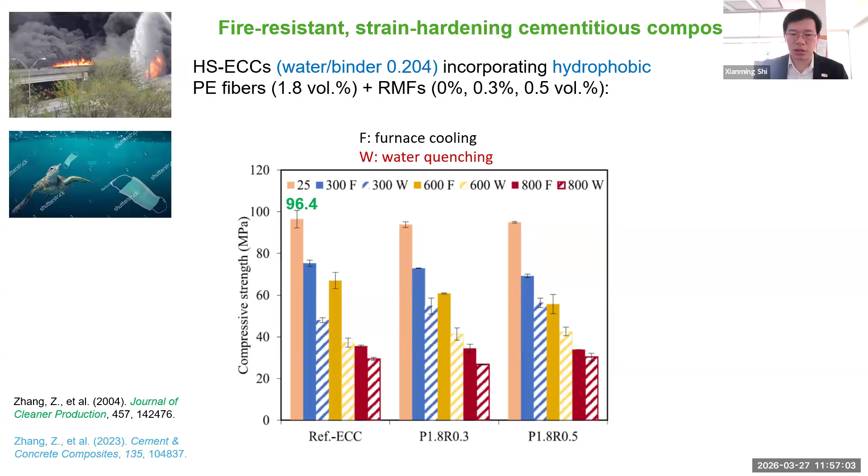Yet another one is again ECC, or strain hardening cementitious composites. We demonstrate that we can use very cheap recycled masks or recycled clothes to endow the ECC with much better fire resistance. Without it, the ECC would have explosive spalling, but with it, they remain basically intact under fire attack.

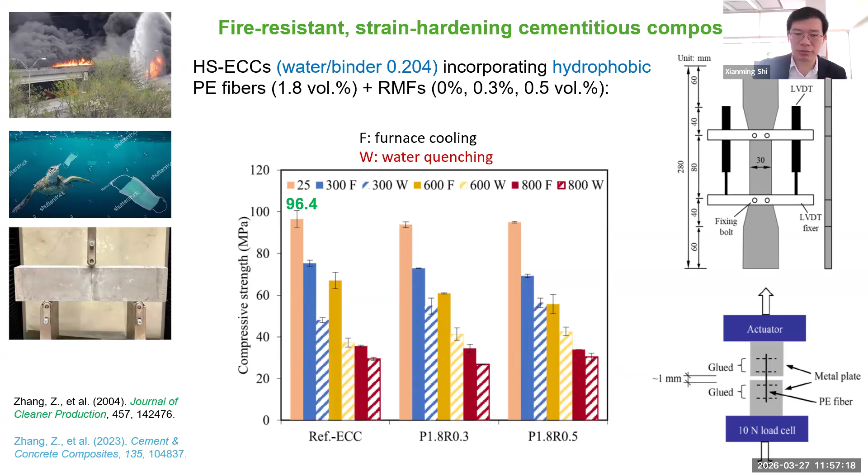So with that, I would say for the future, we still have a lot of work to do. We would love to continue diverting waste streams towards beneficial use based on our domain knowledge and creative thinking. Because of aging infrastructure and emerging technologies such as artificial intelligence, digital twin, drones, robotics, and so on, there's a lot more civil engineers can do—it's pretty exciting times, in my opinion.